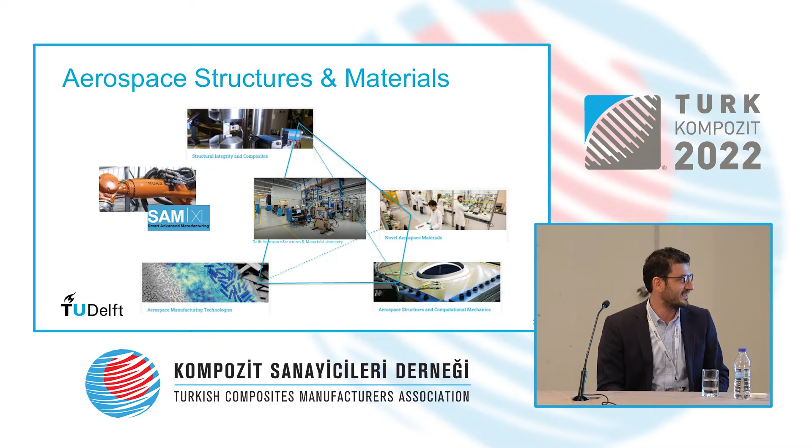Rather automation. We have a sister organization where there is automation-related work. And apart from low TRL, they're trying to fill the gap between industry and academia. We have a very big laboratory there, as you can imagine. And based on my research, I can easily say that composite materials, I'm sure you're all aware of this, start with fibers and extend to, and in the lowest scale, we have ultra-thin plastic tapes.

And again, apart from the academic work, we have an industrial manufacturing machine which has been recently bought, mainly focusing on natural fibers or those fibers which cannot be stretched along. And it is about the integration of these fibers. And as we know that one fiber may not be working in the same system as another one, we have different types of approaches.

We have physical modeling in almost every type of our work approaches. And we are adding artificial intelligence to each and every project. And again, it is possible to predict these, make a prediction in seconds.

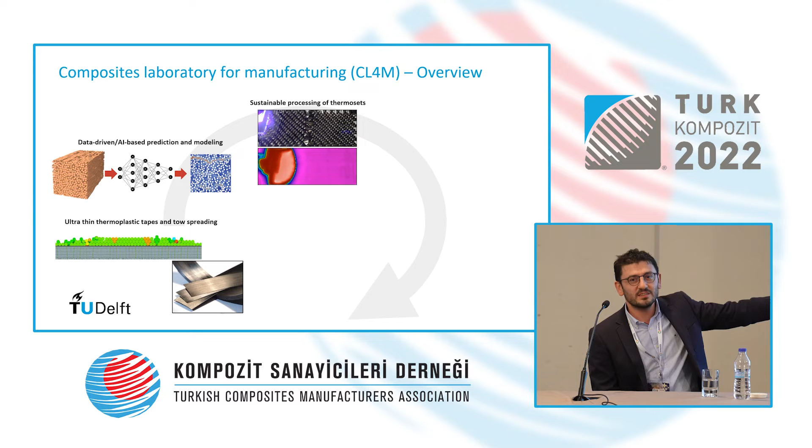I haven't put it on the list yet. Well, we have many works about recycled materials as well. And now I am going to talk about what we are mainly working on. I'm going to tackle 3 topics in much more detail than the others. But if you have any questions, please do not hesitate to ask whatever you would like to ask, okay?

Now, as I said, ultra-thin thermoplastic tapes are the main matter of interest to us. And to produce a very thin tape, like 24, 6 or 3K, comes from spreading the carbon fiber, first of all. And of course, you have many advantages with respect to this. The thinner the thickness is, the better the mechanical properties.

This is, for instance, T800 fiber. Whenever the thickness goes down, it becomes thinner, your mechanical properties get closer to the fiber's mechanical properties. This is where we start working. And this is the automation-related process, and we would like to push it to the limit.

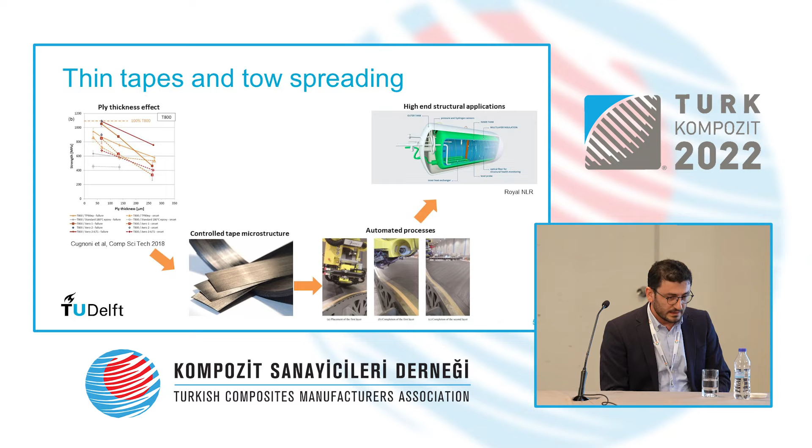And again, we are working together with the pioneers in the industry in the Netherlands, and the purpose there is for these ultra-thin thermoplastic tapes to be used for liquid hydrogen tanks. And as I said, we made lots of investments, and of course we're not going to start working on it immediately by buying the machine. We are working on the academic side of it at the moment.

And we have the spreading bar. Spreading means to spread the fibers all around. So these spreading bars. Now, we have a small arrangement in our laboratory already, and we have spreading bars. And we have the tension sensors that are sensitive to stretching.

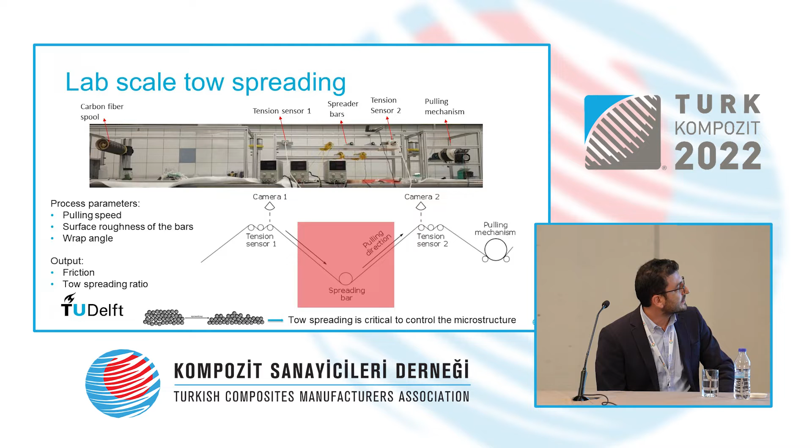And for about a year now, in order to understand the reasons behind this spreading process, we're carrying out many activities, and there are so many parameters. Of course, you always want to stretch it as much as possible. And the roughness is also very important. We're working on these. And this spreading process has been modeled like this, on a layer belt, on a layer band. Well, let me ask you a question then.

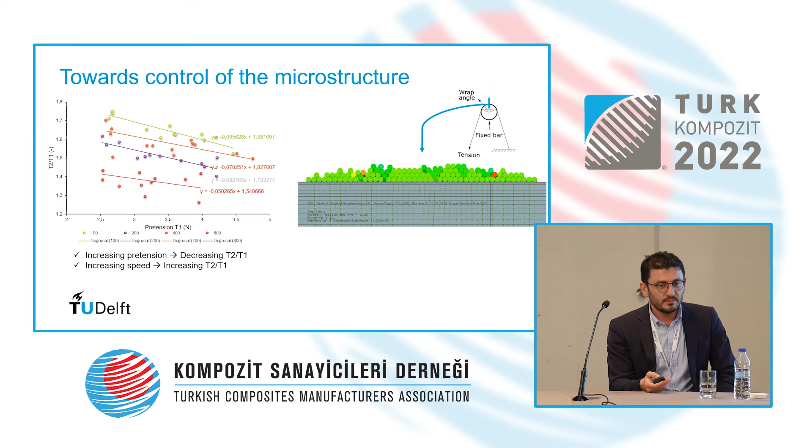And the next topic that I'm going to be talking about is going to be artificial intelligence. As I say, I'm very active on the thermoplastic. And the characterization and modeling was my PhD thesis.

So we're working with many different types of processes, but we also have RTM. We are trying to develop an RTM variant, for instance. And in terms of the infusion, following up the flow, it is very important to follow up this model. And again, in RTM-like processes, based on the flow process, there may be some voids, and you may again use a model to predict where they are going to occur.

And on the other hand, we have different types of models. We can understand these through the physical models to an extent, but then we have some trends, and these models are not able to catch up with them. Therefore, we're using the data we have in hand, and we're using the methods there in order to catch up the models, and we are just trying to figure out where that trend is going to be.

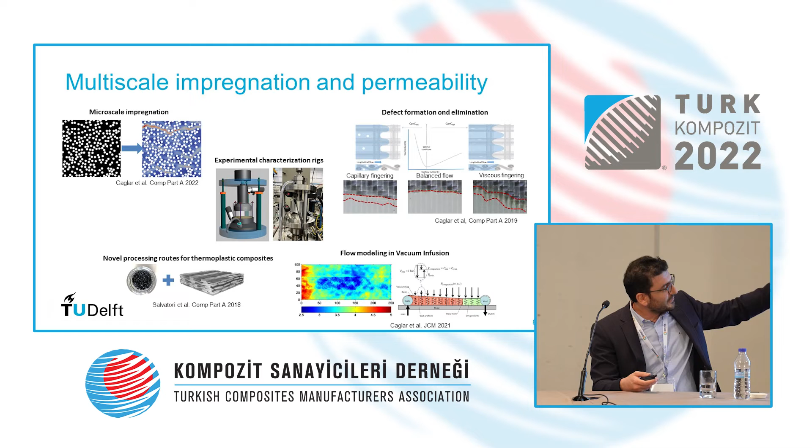And the most significant example comes from a publication we recently did. I'm not going to go into the details, but there is a convolutional neural network, an artificial intelligence method. By using this, we've done something. Normally, in order to predict how this is going to be impacted, you have to make some predictions. Based on my own experience, I can only make some estimations, and it is never longer than a couple of hours, I have to say.

And you can just disseminate different types of structures. And when you make a prediction based on the artificial intelligence, then, as I say, again, you have an acoustic camera, and again, here, it is going to give you some information about how that comes out, and when you have to stop it, and how much strength you're going to be applying.

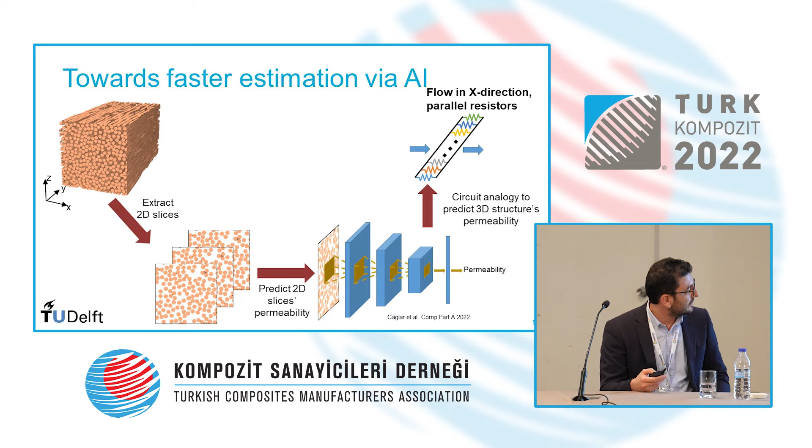And on top of this, again, Airborne, a company very well known in the Netherlands, is pioneering this RTM, automatic RTM process. It is going to help us to come up with a closed box process. And again, I don't want to go into the details. Physics-based predictors are not as successful as this one we have.

And what we see here is, well, there are very simple models in literature. And again, for this high performance, we see that there is a divergence. And again, in terms of the prediction quality, it is possible to make the estimations in an accurate manner.

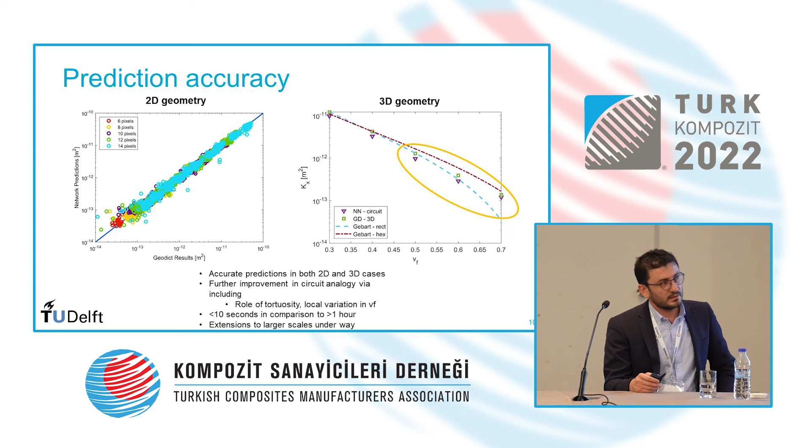I'm going to show you two videos, if you allow me. On one of them, you're going to see the scenario with the resin. And again, you're going to see the UV light as well. And you're going to see a hot metal there. Well, this is never a very simple process, as you can imagine, because on one side, in order to see curing, you have to see the energy activating, and a part of it goes to the fiber, and the process control is possible. And we're working on this at the moment.

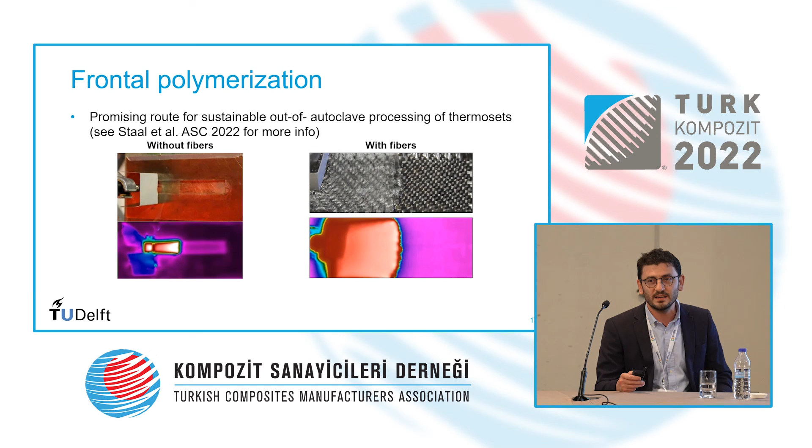As far as we can see at the moment, there's a 5 centimeter progress per minute, and it is possible to see this. And in terms of viscosities, we usually see this again and again based on the first calculations. We need less energy.

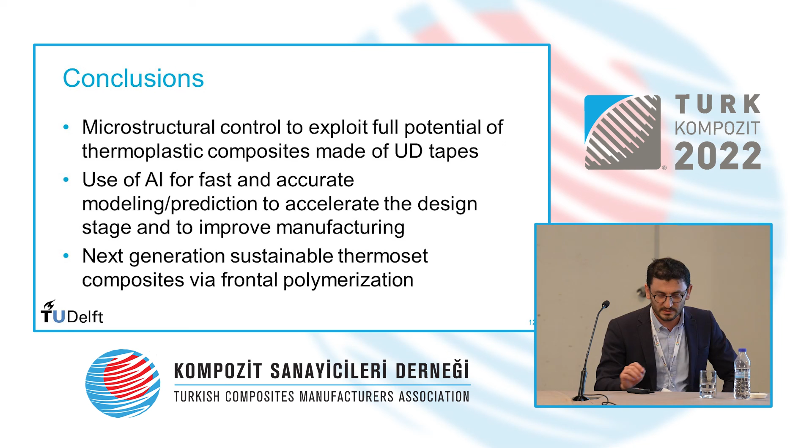Now, as for the final thing, in Delft, in the manufacturing group, I'd like to share what we do there. And as I said right at the beginning, we start from the smallest scale and reach up to the highest one. And of course, our contact with the industrial partners is increasing in this respect. And the modeling is also a part of it. And we're using the artificial intelligence tools as much as we can in this respect.

And as for the final thing, I would like to thank the researchers who have contributed to what we're doing at the moment. Thank you very much.